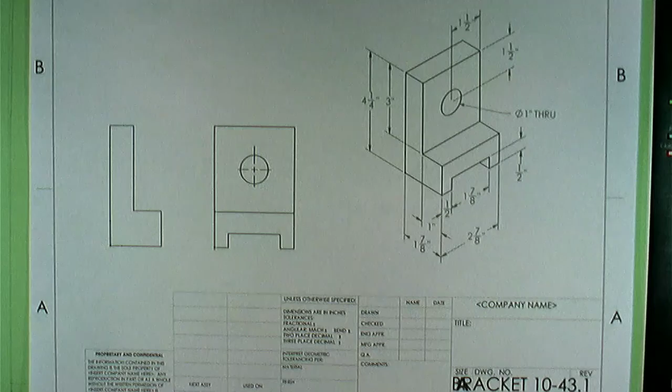So I'm going to show how we can sketch this out and throw some dimensions on it. I'm going to do this part first, just doing a sketch. Basically, we're going to produce this, but I'm going to go through actually doing it. And then I'm actually going to show how to draw it on green paper. We're going to start by looking at this, though. So this is the object that we are going to draw in orthographic, but then dimension.

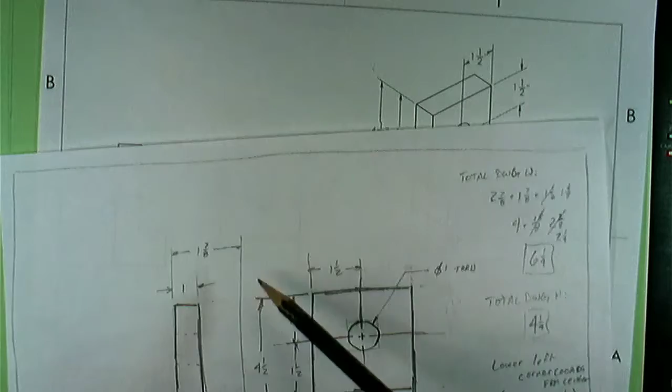The reason I'm giving it an isometric with the dimensions here and then an orthographic over here is because I just want you guys to focus on the dimensioning aspect. Drawing this in orthographic is going to be a piece of cake for you, but adding the dimensions is what's going to be the new challenge because that's what we're going towards learning. And that's why there's no dimensions on here, because I want you to actually use appropriate dimensioning techniques to get the dimensions to all the places where they should be.

So that being said, these dimensions may not be the exact right dimensions that you want to use or in the exact right places, because you're going to have to do some thinking and make sure you follow the rules that we've gone over in class on where dimensions should be. So anyways, though, this video is going to show how to do the sketch.

To start out, I'm going to start with a blank piece of paper, right? I just so happen to have this here. I'm going to move this off to the side so I can pull it in when I need it. It's never a bad idea when you're doing a sketch to throw on a loose border, just so you're kind of thinking it's a sketch. The lines don't have to be perfect. It's just sort of the gesture of a border. So we're sort of visualizing every piece of this drawing that we're going to have to do ahead of time.

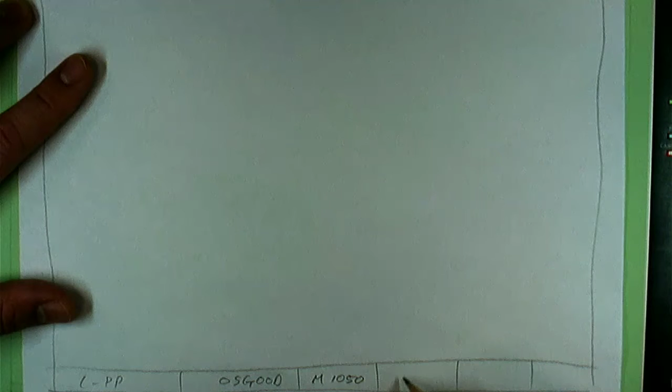CPP, your name, the class, the date. What is it? The 13th today? Yeah. The scale of this will be 1 inch equals 1 inch. And this one will be, we'll call this bracket.

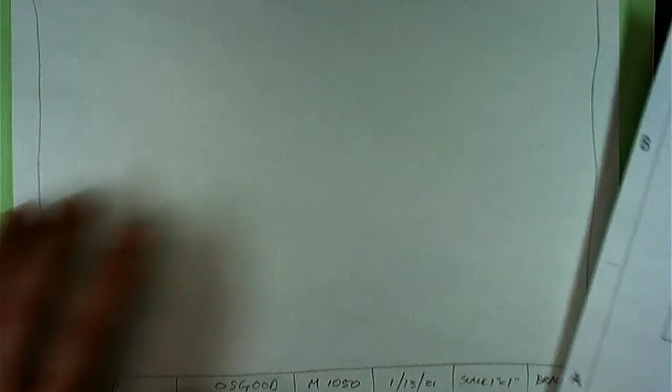And because this is the kind of first drawing we're doing, I'm going to show you exactly the one that I'm asking you to do in class. In the future, I may make different videos, but it's not going to be the same one that I assigned. So this is what you're going to be given in class. And what I'm about to show you is what I'm expecting you to do first before drawing it on green paper. I really just want to be really clear about this, and I haven't done one like this for this class in a while.

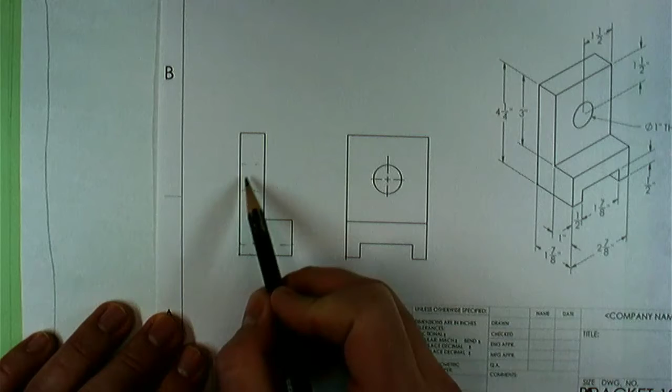So looking at this object, obviously we're going to have to create these shapes here. And actually this is missing, right, like a hidden line that goes down here. So we'll have to throw that in there too. And it's missing the hidden lines for these circles. So we could put a center mark in there too. But let's just sketch for a second. I wanted to show you guys how I sketch these things out. I'm going to just start with that front view.

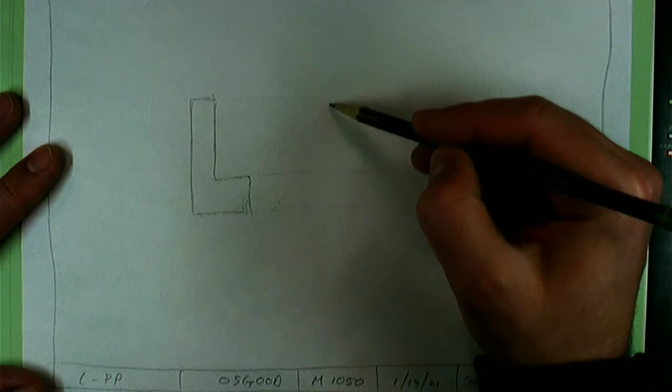So we definitely know, looking at the isometric, that it's going to be a kind of L shape. Ooh, it's actually a little shorter than that. So you always want to try to, when you're sketching, get these proportions about where they need to be. Yeah, something like that looks pretty good. Let's project over to get the right side view. We're actually going to just omit the top view just for the sake of simplicity here. So something like about that.

We'd see that there. And if we look over here just at the isometric, we know we have this bump up in the middle and we have the hole. So I'm going to go like this for the bump up. And now I see, okay, that's where that hidden line is going to come in there in the front view. And then I also need that hole. So let's find the center mark for that first. Always start with the center mark before you go sketching a circle or an arc in.

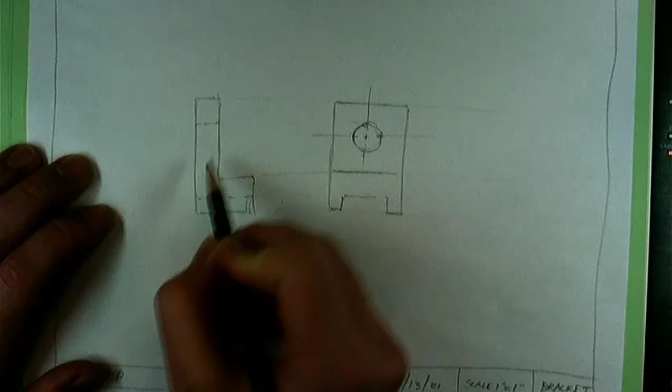And then we know that it's going to be around there some distance. So I'll sketch in that little circle. And that gives us the top to bring over for hidden lines and the bottom to bring over for some hidden lines. So things are looking good there. Let's make that hidden line look more like a hidden line. Cool. Okay, now we can start adding the dimensions. So thinking about what we learned in class about how to place these things, and you know what, I'm going to zoom this a little bit.

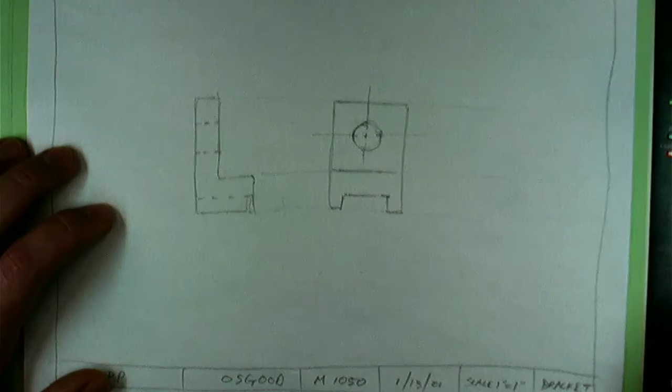That's better. Let it focus for a second. Hello. Okay, perfect. And there. Okay, that's pretty good. So thinking about what we learned in class, can I lock my keypad here? There we go. So we don't have to see that weird menu sometimes.

So thinking about what we learned in class, we want to show the dimensions in the view where they basically make the most sense. So in our case, actually, now that I'm looking at my own dimensions, I think I could have done them a little better. We want to try to keep dimensions between views. We want to always show the center location of things. And again, we want to show things in the view where they make the most sense, basically where the most shape is seen. So in this case, we definitely want to start showing what I guess based on our views is our width here in this area right here.

So I'm going to show the distance from the left side of the object to the back of the object. And taking a look at our isometric here, we know, okay, from the left side to the right side is, let's see, 1 7/8 of an inch. So basically what we're doing is we're planning out where all these dimensions are going to go so that we don't have to think about it when we're actually drawing on the green paper, which is underneath all this. The distance from here to here is about 1 inch. So I'm going to show that right here. And then we could sketch in our arrows.

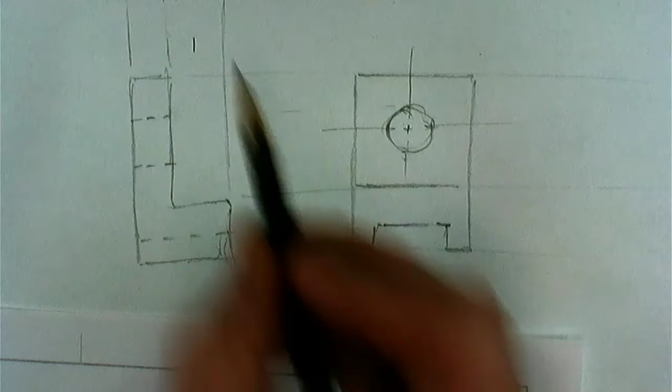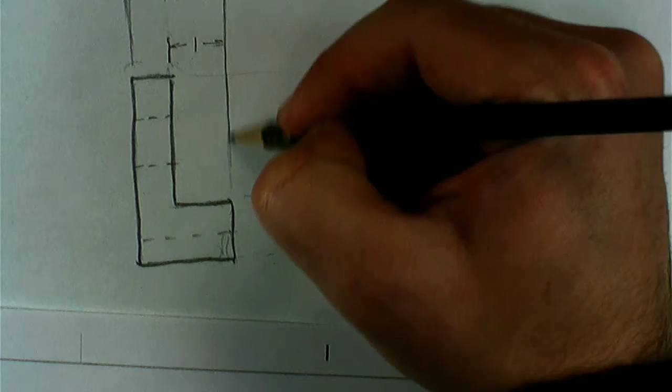And notice, following the rules that we've talked about in class, there's a gap, a gap, a gap. There should always be a gap between your object line and your extension line. You never want to have your extension line touching. And our extension line should be thinner and lighter than our object lines. That's why I'm darkening things in here so that they're sort of distinguished. And we even see that actually in the isometric here: these are actually slightly lighter. You'll notice they're more gray than the actual object lines. So let's add more. Okay, so those are some extension lines.

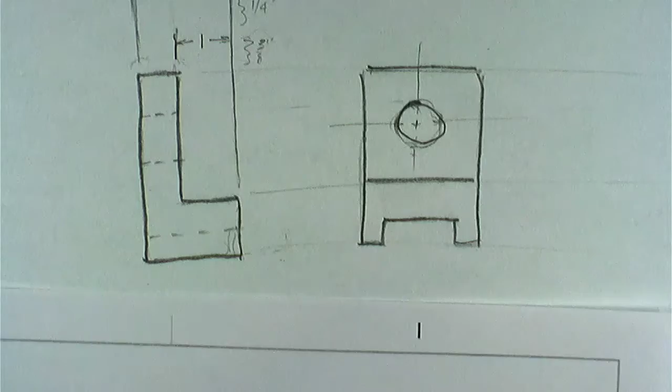Oh, and we do want to remember too that the distance between the object and the first dimension, remember we said, should be 3/8 of an inch. You won't write these in, I'm just putting them in for reference. And the distance from here to here should be about 1/4 of an inch. Obviously, I'm just sketching this, so it's a little ugly, but when you go to do it on your real drawing, you want to make sure you hit those right distances. So let's keep going. So we just took care of these, okay?

We also need to know some details about the overall height. So why don't we put some of these on here so we can tell that the distance from the top to the bottom here is definitely 4¼ inches, but I have to do another one inside of that for this distance. So let's add that on here. And again, I'm doing it in the side view here because we see more shape. So it makes more sense to show that here than it would in the front view because you can see a little more clearly the actual edges that I'm dimensioning to.

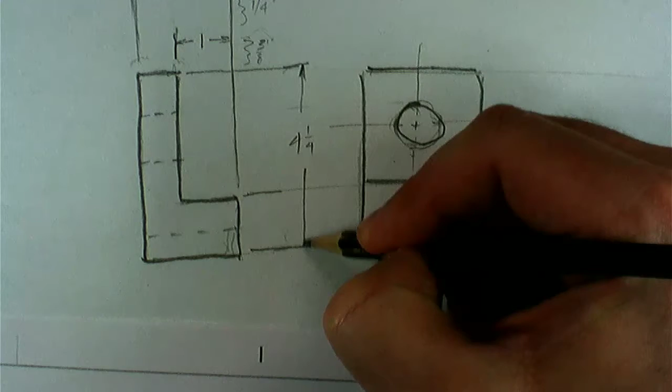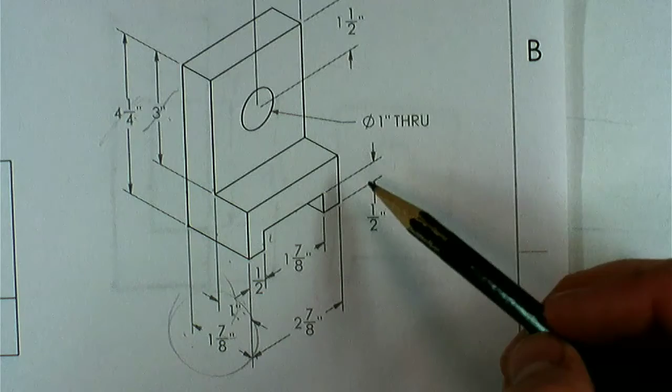So that was 4¼, an arrow, 3 inches. And I'm not putting inches after any of these because down here on the bottom, I said that my scale is 1 inch equals an inch. So I don't need to be redundant and keep showing that. Cool. So we got some of those taken care of. I just took care of these. Now, you may be tempted to try to include the dimension from here to here over here because you've already done that, or the dimension for the hole, but it makes more sense to show those in between these two views.

Now, in this case, I might break a little bit of a rule because of the way I drew these so close together, and I could probably put the dimension on the outside. But in a real drawing, we want to try to keep the dimensions between the views as much as possible to keep things nice and consolidated. I'm going to shrink that down so that now I can start putting dimensions for the location of this hole and other things in the other space over here on the other side.

So let's do that. Let's see. We're going to definitely want a dimension from here to here. We want a dimension probably from here to here. Look, I've already sort of got a line for that. And we want to definitely dimension from, let's say, actually, let's start from the top. So that's a sketch. It's almost like having a conversation with yourself. Like, where do these things go? I have a pencil. I can erase. So maybe I didn't want to do that.

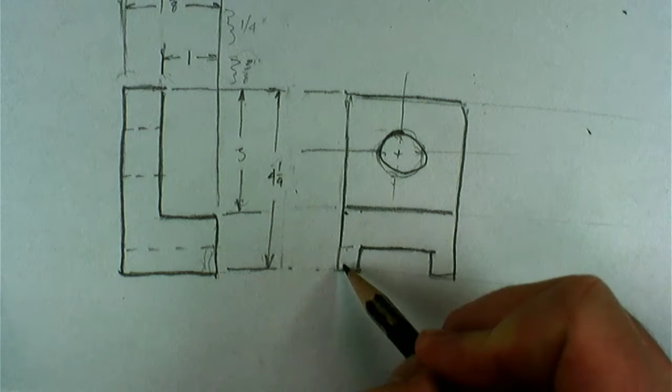I want to go from the top to the center of the hole. Good. So there'll be a dimension in there. From the center of the hole down to the bottom of this surface here. Oh, wait, I've got that already. I don't need to even put that in there. So let's just go from the top to the bottom. In fact, I do need to show the distance from here to here. So again, a conversation with yourself.

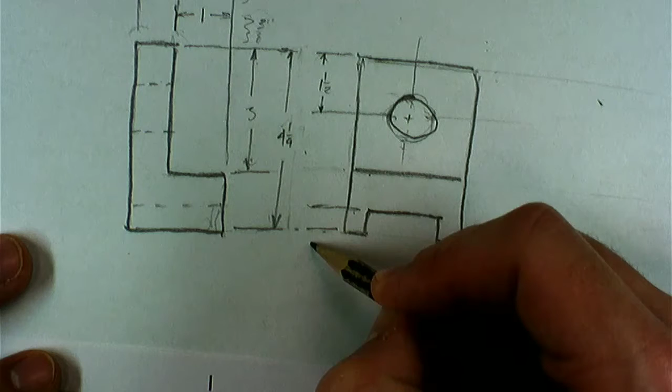So this distance is 1 1/2 inches there. So I'm going to put 1 1/2 and get some arrows in there. And down here, I'm going to do a 1/2 inch for that distance. And I don't think that's going to fit too well inside there. So we can go like this, 1/2, and then put an arrow in there, and that would be acceptable in this case.

Then we've got to dimension this dimension here. So again, it doesn't have to go from here to here if we know that this is centered, which, oh, it's not though, actually. It's 1.5 inches from here to here. So let's make sure we put that in the right spot. So that's going to go 1 1/2. And let's see, is there anything else I'm leaving out here?

So on the bottom, I'll do the overall 2 7/8. 2 7/8, and I left myself space inside so that I can do this dimension and this dimension. We have 1/2 and 1 7/8. So those are going to go right in there, and we'll stick a little arrow on the outside of that for the 1/2.

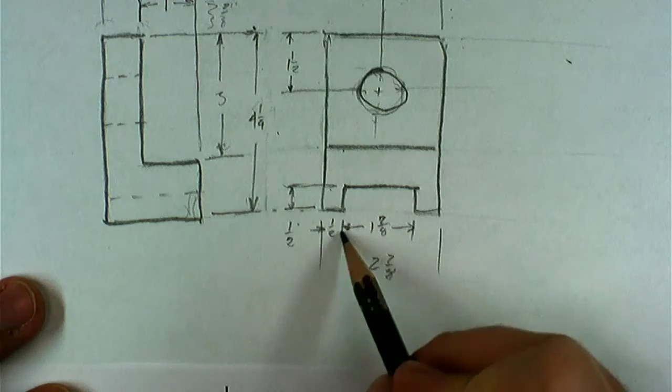Oh, I also have to do the leader for the hole. So remember, an arrow or a leader always points towards the center. So I'm going to sort of pretend I'm doing a line out, but I'm only going to darken the part that goes outside here. And that is 1 inch, and it's what we call through. So, diameter 1, THRU, meaning that's a hole that goes all the way through. And now, I do believe that I have all the dimensions I could desire on here. Remember, you're going to leave these off. I was just showing that to remind you of those distances. Oops, I left out an arrow.

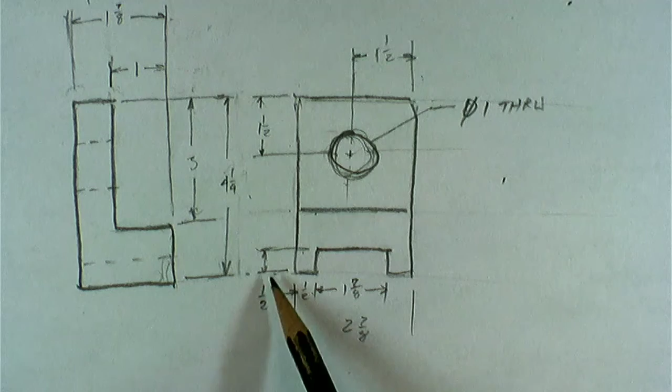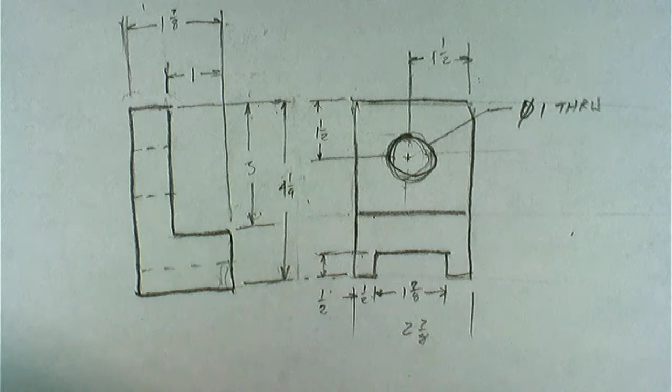Yeah, so I think that pretty much encapsulates all the different distances. So there are other ways to do this. Like maybe it would have been better to put this 3 over here so that it was more together with those. But dimensioning is sort of an art, and you will get different ideas of how to dimension things based on just doing it over and over and deciding what looks good and what doesn't. Because remember, the main goal of dimensioning is to communicate details about the object to anyone who's going to look at your drawing. So, all right. I think that kind of sums this up.

Oh, the last thing too: always remember you'd want to calculate the overall size of this base drawing so that you can position it correctly on your green paper from the center of that green paper. So we can calculate that by looking at these overall distances here. And again, these are not dimensions you would include in your drawing. These are just for me to use here while I'm talking to you guys.

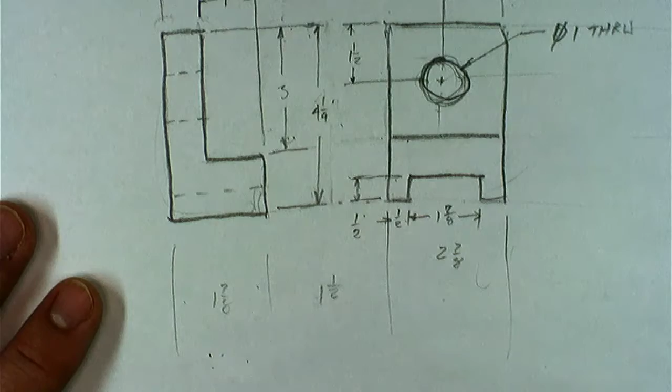So from here to here, let's see, that's 1 7/8. We're going to leave 1.5 inches between the views, and the overall width of this is, what is it? Did we leave it off here? Oh, no, I included it, but I didn't include arrows. So there's that. So let's see, that's 1 7/8 plus 1 1/2 plus 2 7/8, and that comes out to, you can do the math on your own, 6 1/4 is our overall width, total width.

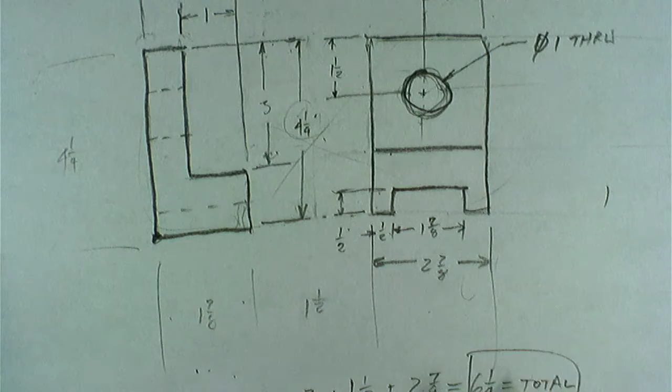And then let's draw a box around that. So remember, our total height is super easy because it's just the height of the object, and we wrote that right in here. That is 4 1/4. So we know that if we're trying to find this lower left corner from the center of our page here, how far we have to go over and how far we go down, we're going to cut both of these numbers in half. So half of this is 3 1/8, and half of this is,

oh, maybe I'm off the screen there, 2 1/8. So our distance over and down would be, let's see, negative 3 1/8 from 0, 0 at the center, and then down to 2 1/8. So, that'd be negative 2 1/8. So that would be this point right there. So you know that when you're getting started in your drawing, that is going to be the spot that you're starting at.

So hopefully this helps to see how we generally lay out dimensions and how I expect y'all to sketch them. And then later on, I'm going to have a second video here that's going to show how to draw this on the green paper, and that will be coming up shortly here.

So this video is going to show how to draw this object that we see here, which I have shown already. I sketched that out from, where'd it go? From this right here, which is the assignment that you're working on. So you should be able to follow along with this if you need to. So I'm going to go through actually drawing out the general shape of this for a minute first.

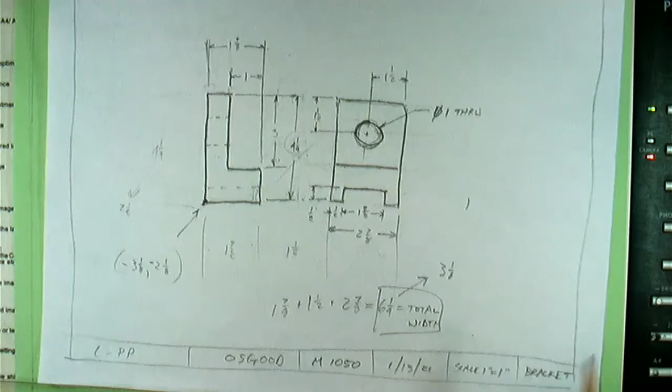If you don't need that and you understand how to do that, you can skip right ahead to the part where I'm dimensioning this. But I wanted to do that first just in case there is anybody who wanted to see that again, just as a refresher, because it's been a while since we've done one of these on a piece of paper. So again, in the description, there'll be a link to skip to the part where I'm dimensioning.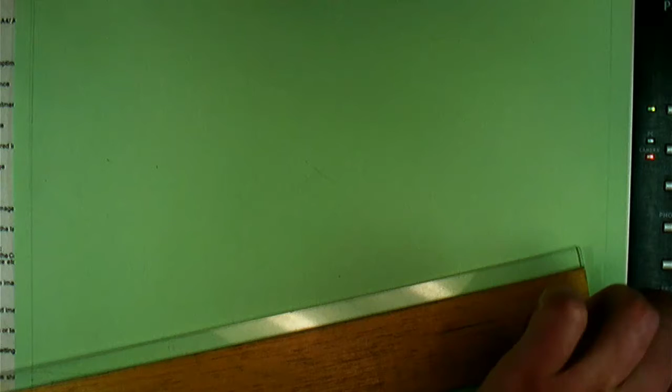So anyways, we're going to start with this point down here, which I already have my center marked out on this piece of paper. It might be a little tricky to see. There we go. If I adjust the brightness, that seems to make it a little better. So let's see, keypad locked, good.

So I'm going to start with this point down here, which is 3 1/8 over and 2 1/8 down. So I'm going to do that here. So 3 1/8 over right there and 2 1/8 down. Now, normally I yell at people and I say, oh, you got to use your triangle to get that vertical point. When you're just starting out and you're getting this mostly centered, it's not the end of the world if it's not perfectly centered. If it's a tiny bit off, usually people won't even notice, especially with us adding dimensions. So don't overthink that stuff too much here.

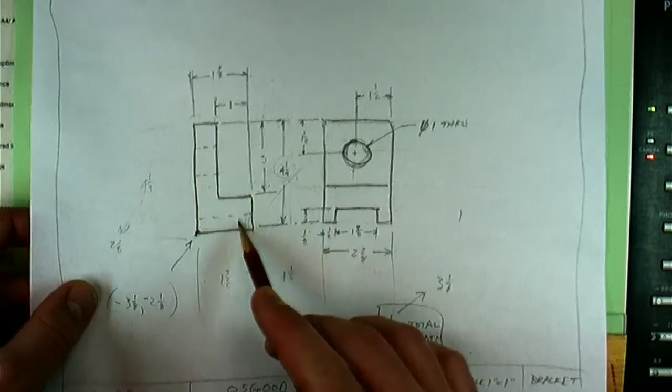I am using a 4H pencil to be drawing out and sketching out this early part so that I can make sure that everything is nice and light and easy to erase later if I need to. So I'm just going to go in here and sort of mark out that lower left corner there. And then I'm going to start making these marks across to get my front and right side view blocked in so then I can cut away some material here.

So let's see. The overall width of this is 1 7/8. So I'm going to go 1 7/8. Then I'm going to leave 1.5 inches. So there's 1 inch. And then 1, 2, 3, 4/8 for 1/2 inch. So there's my space between the two views.

And then 2 7/8. Let's see, I'm going to go over, can I get this right? 1, 2, 7/8. 1, 2, 3, 4, 5, 6, 7, 8. Now, the reason I didn't move my scale was because every time you move your scale, you actually run the risk of introducing a tiny bit of error.

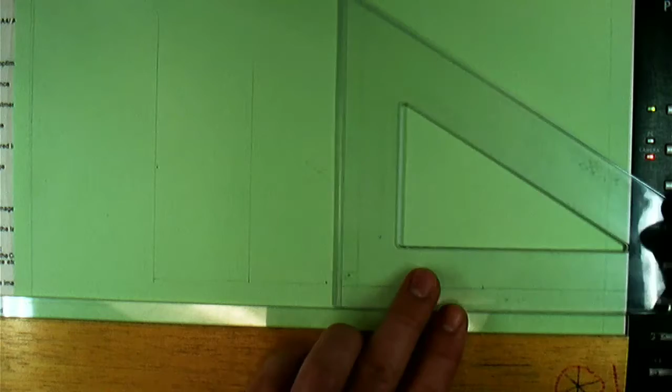So I'm trying to avoid that. If you move your scale, oh well, we'll figure it out. We'll make it through. But just know that it can introduce a little accuracy errors. So if you can actually count over, then you're going to have better luck in the long run.

And I'm looking at this now. Well, I guess that's right. Sometimes you end up sketching things and it looks totally different when you actually draw it. And that's what I'm looking at now. I'm like, this looks like it's going to be a lot different than how I sketched it. So I must have sketched it a little wrong. So we're going to find out.

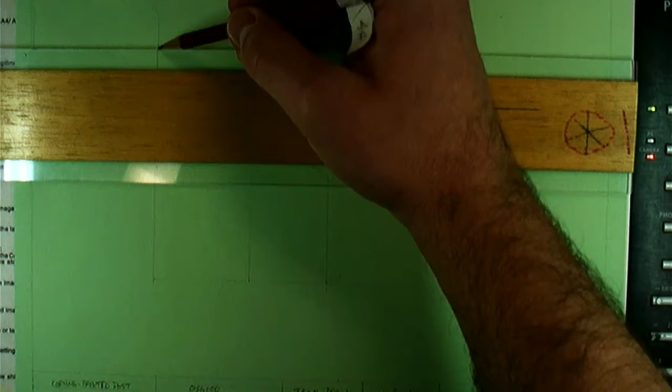So for the height, I've got 4 1/4. So I'm going to go up 4 1/4 of an inch. 4 1/4. And I am resting this on the T-square, which isn't the best thing in the world, but it'll be okay. 4 1/4. So there's the tops of my views. Yeah, so these are going to be a bit of a different shape than I was expecting, and that's okay. That's what you learn sometimes.

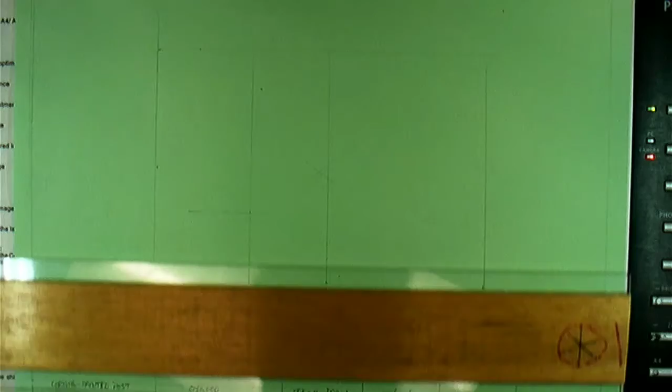All right, from the top, let's see, 3/8 of an inch down. So I've got my general shapes outlined here. 3/8 of an inch down to get this line, and 3 inches down and 1 inch in. So let's throw that on here. So 1 inch in and 3 inches down. Ta-da. Like that. Get us a nice vertical line in here. Oops. I'm running into my projector here. So there's our general shape for that part. Then what else we got here?

And there may be a bell that interrupts this. I'll try to cut it out if that's the case, but just FYI, people.

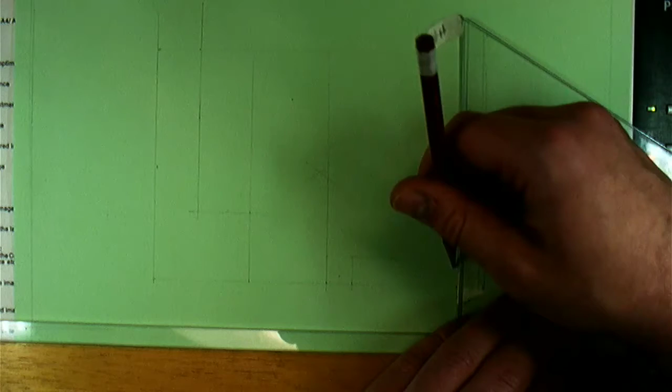So, all right, let's do our right side view now. So we just did the front view. So I know that I have to come up 1/2 inch to get that little doohickey in there, that little opening. So let's get a horizontal line across there lightly. And I also know that I have to come 1/2 inch in for these sort of legs. So we'll do that on each side. Again, I didn't move my scale as much as I could avoid it so that I didn't introduce any error into the drawing. All right, there's that.

I'm looking at this. Let me adjust the brightness on this again. Oop, my keypad's locked. Hey, there we go. Ooh, nope, that's not good. That's not what we want. Well, oh, there. Yeah, if I make it darker like that, I think it's a little easier to see the lines. So, cool.

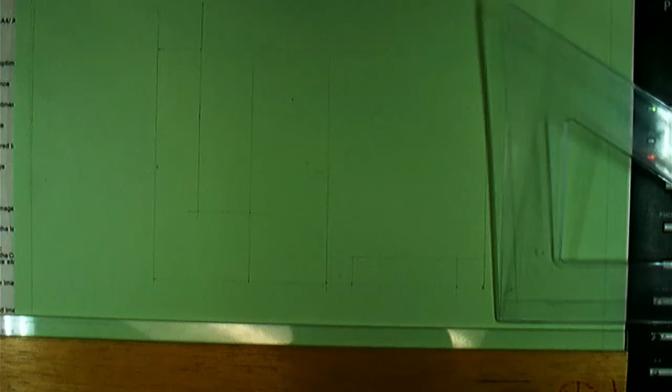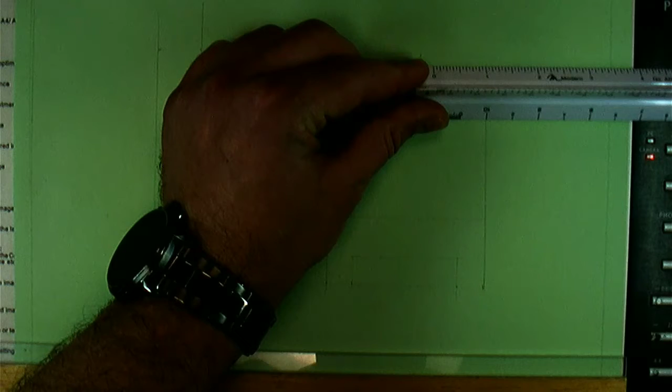Let's find the center of that circle. I will be able to project this line over, so I'll do that quick, and then I'll find the center of the circle, which is 1.5 inches in and 1.5 inches down. So first let's project this line over, and then 1.5 inches in and 1.5 down. Oops, 1.5 in. And then let's get a bit of a vertical line on there. And 1.5 inches down on that. Where'd we go? 1.5 down. And there is the center of our circle.

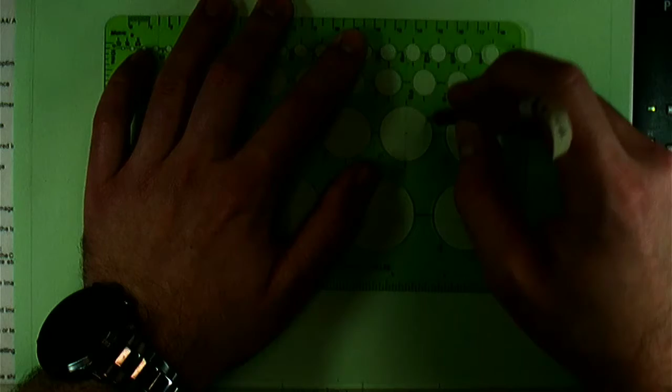So now we can throw that circle on there. That circle is 1 inch in diameter. So I've got my center mark put on. Let's find a 1 inch circle. Lay that on there lightly with some light construction lines. Get that on there. Beautiful.

And let's get some hidden lines up in here. So that's going to be a hidden line. And so is that. I'm not actually going to make those into hidden lines just yet. I'm just projecting them for now. When I go through and I darken everything, that's when I'll make those into all the proper lines.

All right, now I'm just going to preliminarily erase some of these because I'm going to come back in and darken everything later. So I didn't need any of that. Didn't need any of that. Good, good, good. Cool. So this is looking a little cleaner already. We can already see the shapes taking form.

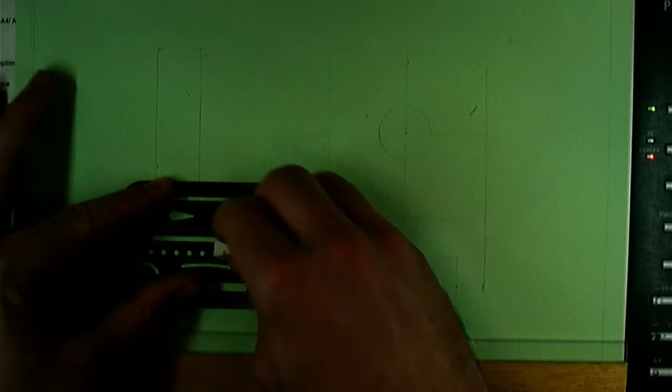And you know what? I could get in here and I could turn these into hidden lines now, and then we'll just darken them later. So I'm using my eraser shield as best as I can here to create those hidden lines. Ooh, right there. Ah, better. And these were all hidden lines too. So never forget the power of the eraser shield over here.

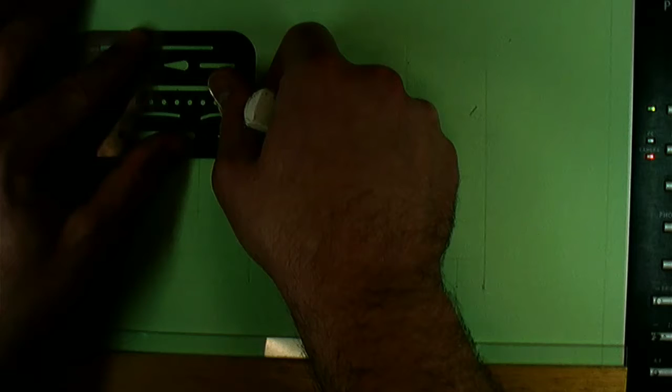It can be super helpful for creating nice hidden lines. We'll slide this down. Try to keep those kind of the same. Cool. All right, that's looking pretty good. Clean that up while we're at it, but we're going to darken everything later. All right, now our basic general shape is done.

So I'm going to darken this now. I'm going to speed up this part of the video, but I'm still going to record it anyways. I like to darken this first before I add the dimensions, just because I think it makes things a little crisper and cleaner. So that's what I'm going to do now. So you can just watch this part. It'll be sped up.

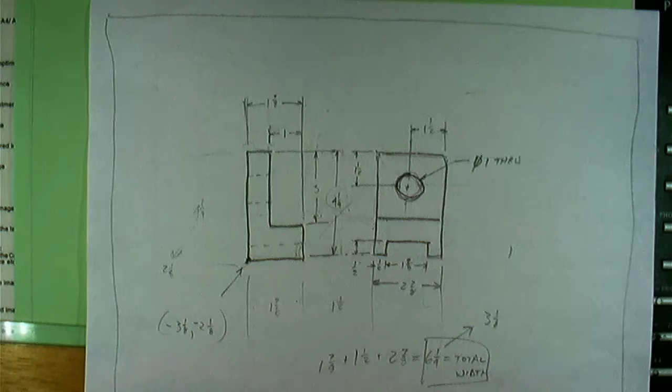All right, awesome. So this looks pretty darn good now. So now it is time for us to start getting those dimensions on there. We already figured out where they're all going to go. Something that can help you a lot: the distance between the object and the first dimension should always be about 3/8 of an inch. And then the distance between any dimensions after that should be 1/4 of an inch.

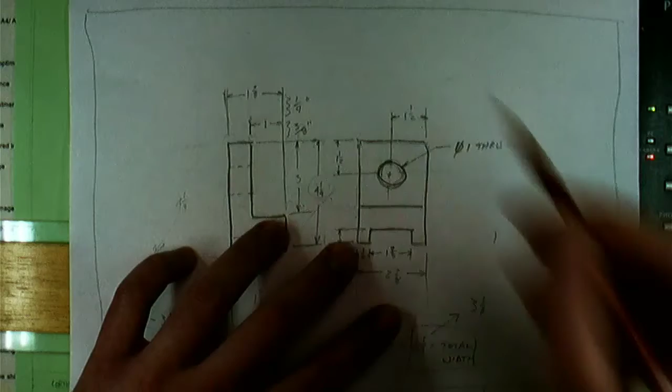Okay. So that being said, it actually turns out that this distance right here is exactly 3/8 of an inch. You might remember from doing your border and your title block that that's 3/8 of an inch. So we can totally use that to our advantage. We should have also scratched a line onto our triangle that is the same distance as that piece of acrylic on there. So that's going to help us do all the different things we need to get our dimensions on here appropriately.

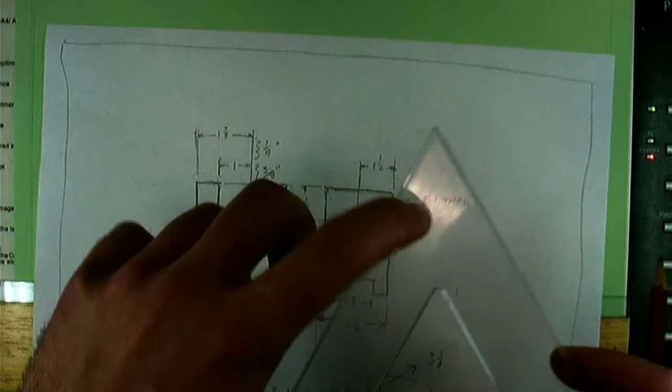So what I do is I first lay off all the extension lines that I'm going to need. Then I lay off all the distances that I'm going to need. And then I add in the numbers last. So let's do that here. I'm just going to pick a spot and start there. I'm definitely going to need extensions for these. Actually, let's start with horizontal extension lines just because it's easier. So here, here, here. Let's get those on.

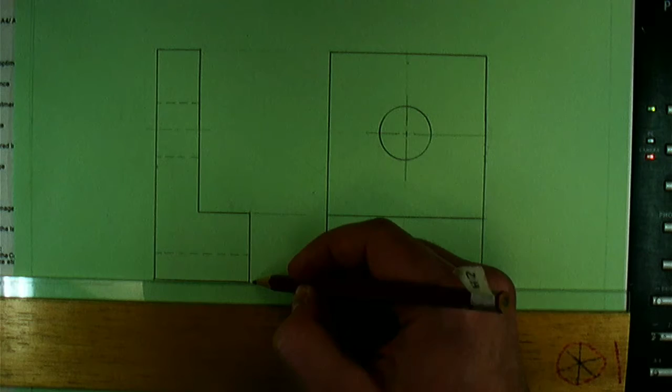So again, not touching the object. They should be far away. And you should use a 2H pencil for this. That's going to give you the best possible line weight. So I'm just going to bring these off of here. I'm going to make sure they're not touching. There should be a visible gap, but I want to make sure they're pretty clear. I'm not going to worry about how long they are for now because I can erase a bit later, but I want to leave myself enough room to fit all the dimensions I need. So there is that one.

So let's go like this, and let's actually put the number on there. Well, first we need to get our arrow line in. So this is where this comes in. You can slide this around, and it's kind of weird because I have all these lights here, they're reflecting funny. You're going to line your line up with the edge of your object, and then you can draw one of your dimension lines down, and then I'm going to space another one after that.

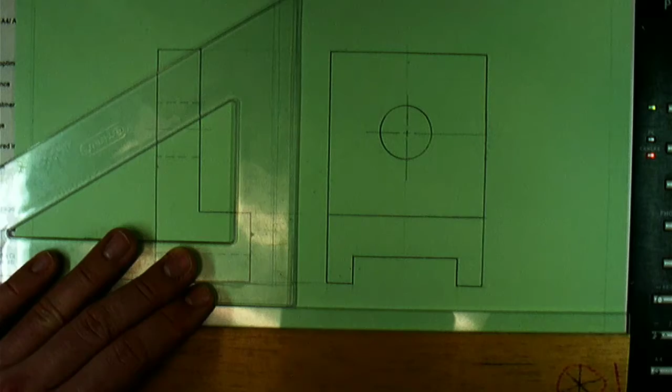So the rule is 1/4 of an inch, but if you have the room, you can actually go longer than 1/4 of an inch and leave more space between the dimensions, and it's okay. So I'm going to go like this. But actually, that'll leave enough room on the other side for one more set of dimensions. So, yep, we're going to go like that. Let me extend this a tiny bit further. There we go. So I'm going to write in my numbers now. So this is 3 and 1 1/4.

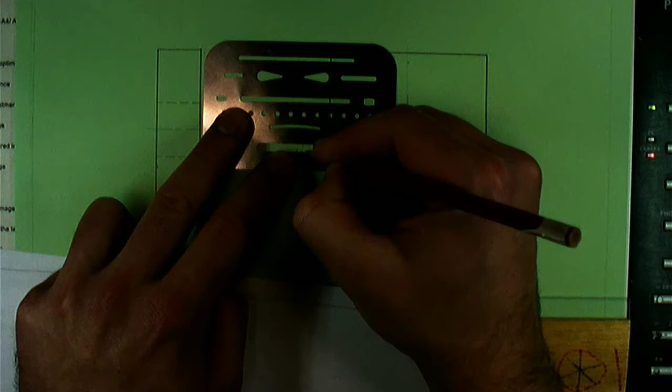I'm going to use this open area on my eraser shield to write inside of so I don't have to use guidelines. So that one's 3, and let's do 4 and 1 with a line over 4. There we go. And then I can come in here and darken those dimension lines that I started there. So I'm going to make darker lines, and I'm going to make sure I leave a gap around that number.

So this one's going to go all the way to the bottom, up to the top. And now I can kind of clean this up. Like, I definitely didn't need that going all the way out that far. I don't need this light line down here anymore. That can go away. And last but not least, I can put my arrowheads onto these. Long and thin. Long and thin.

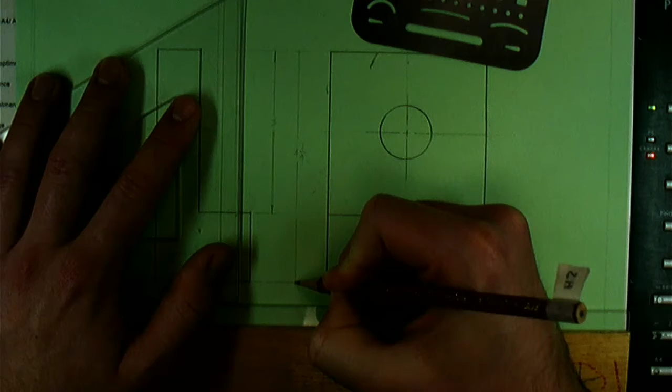And you really want to make sure you save the arrowheads for last because they're very hard to erase because they're usually a little darker. And sometimes you got to go and clean up a line or something too. So let's just fix that little gap that I created. And now we have our first set of dimensions done. So let's just go through one at a time, and we're just going to keep adding more.

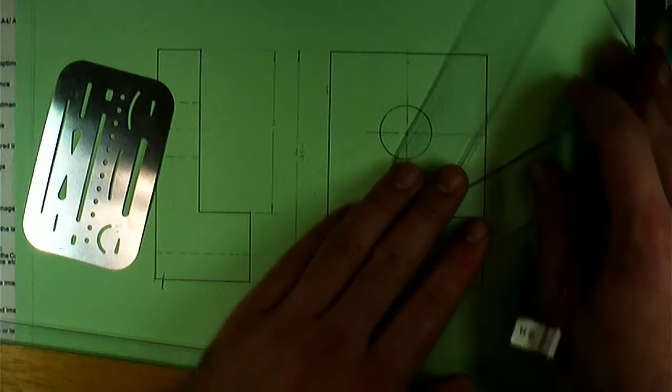So at this point, if you think you understand how this is done, you can probably dip out. Oh, you know what? Before you leave, let me show also how to add the leader over here for the diameter. So I'm going to make sure that I have a line that's going right through the center of that. I'm doing 30 degrees because it's easy. You could pick this up and do it at any angle. Sometimes you have lots of different leaders you have to draw, all coming from the same center point, and you want to do them at different angles so that it's easy to see.

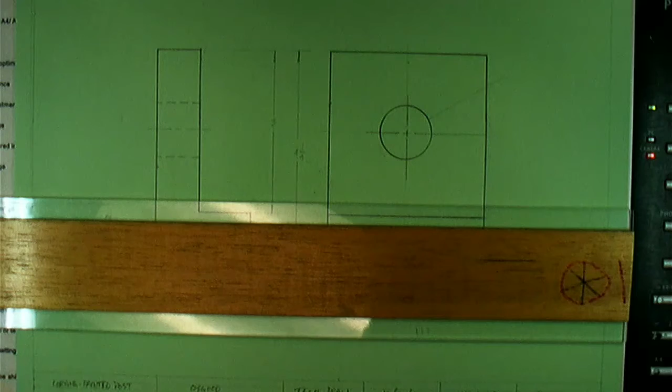So let's draw a leader off of here. We're going to come up about that far. And again, you really want about 3/8 of an inch of space before you go with your horizontal line coming off of that leader. But then I'll do a horizontal line, and then I will put my number in. So that was a diameter of 1, and it says through, THRU. Make sure you are lettering these neatly, and then I will put a little arrow on there. So that's kind of the basic gist of dimensioning.

So again, if you get it now, okay, you could probably leave. But if you want to see how I dimension the rest of this stuff, I'm going to do the whole dimension next, and then I'll add in the rest of them. That might be beneficial for you if you so choose. So you can go now or you can keep watching. I did do my 2H pencil also when I did my center lines and my hidden lines. So that's something to keep in mind.

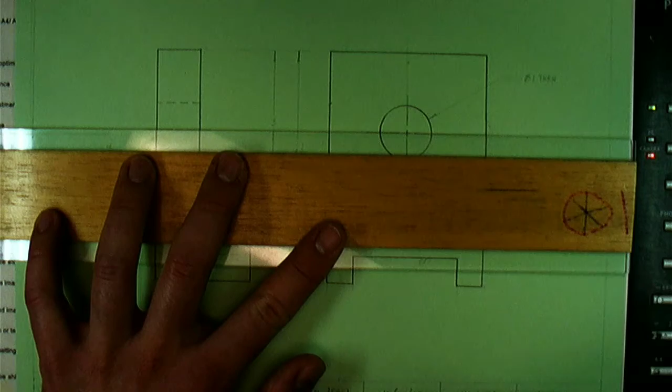I'm going to add this 1.5 inch mark in here, and then the 1/2 inch mark there. So let's draw those extension lines. I need one coming from the top, and I'm going to have some stuff running into each other up here. So I may want to clean things up a bit. I'm going to put a gap back in there because I accidentally got rid of it. Let's see, the bottom here too, my extension lines are a little long. So sometimes things are tight, and this is where you actually may want to leave a little more room between your drawings, but you know, it is what it is here.

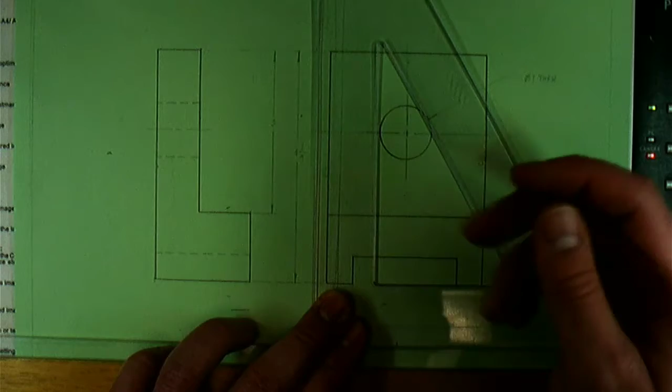So let's see, does this fit? Yeah, that's going to be a little tight there too. So this is going to be a little close. So this is maybe not the best example. I needed one off here too. So I maybe should have moved this over a bit, but you know, use a little more foresight than I did and leave a little more room between your drawings.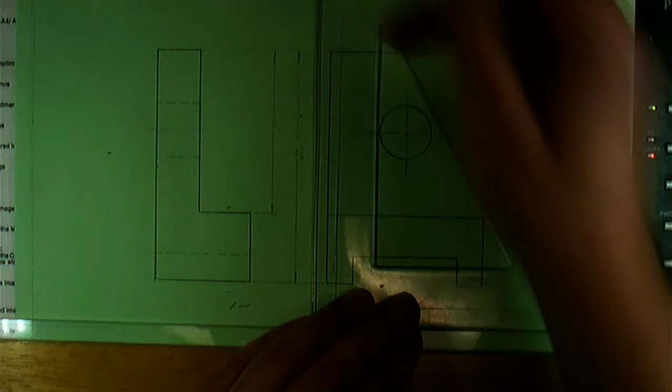And it actually looks like I'm going to be able to do my arrows on the outside of this one. So I'll put my number on the inside and it's going to fit, and I'll have an arrow from here to here. Okay, this one up here was 1.5. This one down here was 1/2, so I'm going to get 1 line for the fraction, 2 on the bottom, and good. And then we can get our arrows on there.

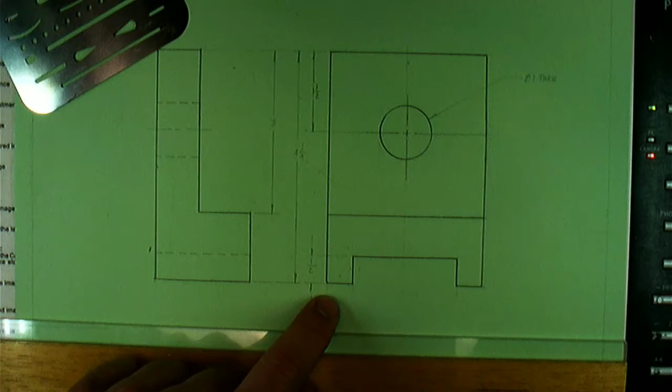Arrow, arrow. And let's clean this up a little bit and kind of darken that so that it's pretty clear that there's a gap there for the number. We don't have to do that down there because it was spaced off there. So there is that point right there. Let's see, what else we got to add? We got to do these bottom ones.

We got to do the hole. I skipped the hole there. Well, I did one of the holes. I got to do the other one up here. So you can see this part of the process is pretty hodgepodge. You're just pretty much checking off all the dimensions that you should have had right on your sketch to begin with. And you're just going through and adding them one at a time and making sure that they're in the right spot and that they follow all of our rules.

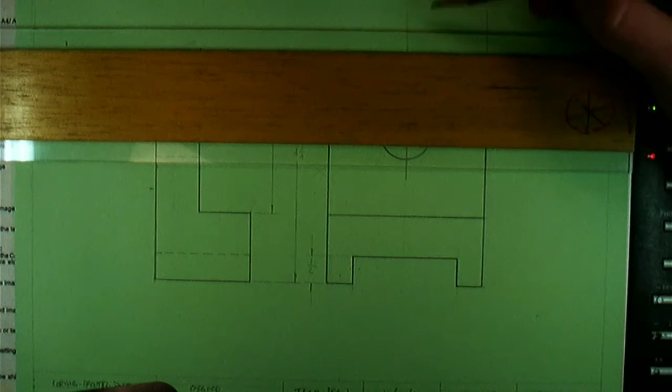So again, that visible gap, there should be a gap. It's probably hard to see in the video, but there's a gap right there. With our center line, the gap is really down here. That's how you can think about that when you're using a center line to dimension. Let's draw the dimension line, which is the one that's going to take the arrow. Let's put our number in, 1.5 inches, 1 over 2.

Let's darken, just leaving a gap for that number. And then let's add our arrows, long and thin. That was a good one. And finally, erase just a bit of that extension line that was going a little too crazy up above there to clean it up so it looks nice and crisp and clean. There's that one. What else we got? Got to have these up here, and got to have these down here. So let's get those in.

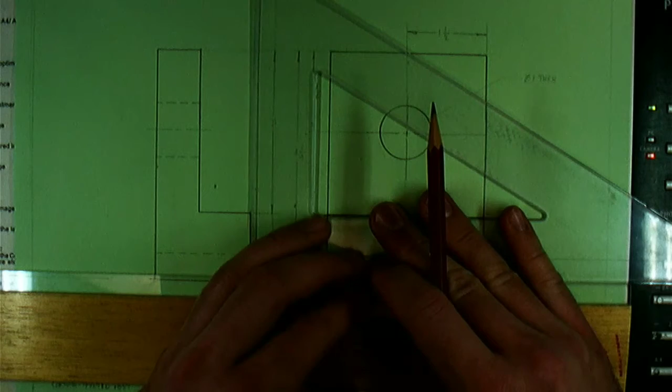Let's start with these up here. Extension lines. One extension line off this. One off of here. One off of the end. Bam, bam, bam. Bring this up. We're going to have something there. We're going to have another one off of that. And so actually I didn't make that extension line long enough. So you come in and correct it. And you just keep going like this until you have everything that you need.

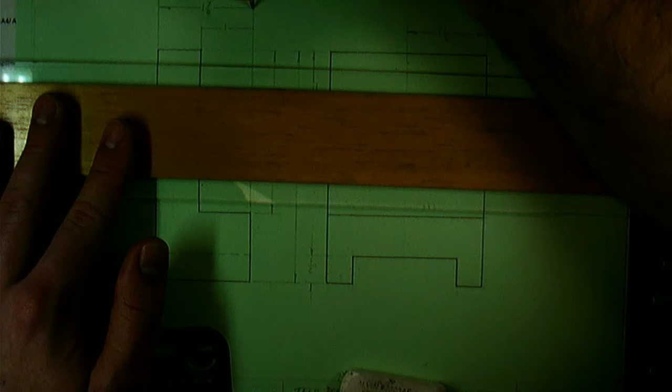So we had a 1 here. 1. And then this overall big distance up here is 7/8. I'm just going to erase so I have a spot to write it. 1 7/8 rather. 1, 7 over 8. Okay. And then we'll clean up again using the eraser shield if necessary, but I don't really feel the need. Darken a bit. And we'll use the eraser shield for this part up here. Arrows. And we can erase that bit in there. So you see how this goes.

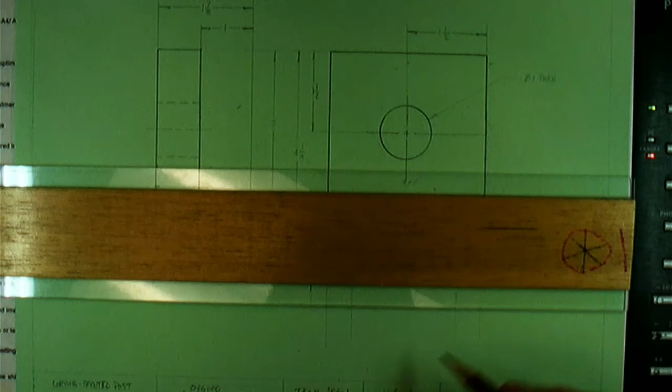So 2 7/8. 2, 7 over 8. This distance is 1 7/8 up here. 1, 7 over 8. And 1/2 for right here. 1 over 2. That was a little small. Darken some things in. I'm going to put these on the outside again for that one. Darken, darken, darken. Overall for this one.

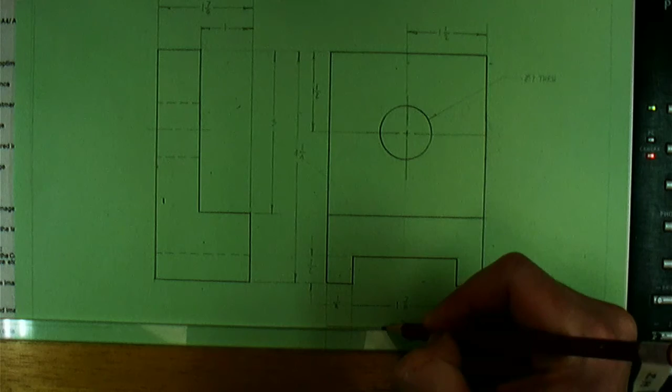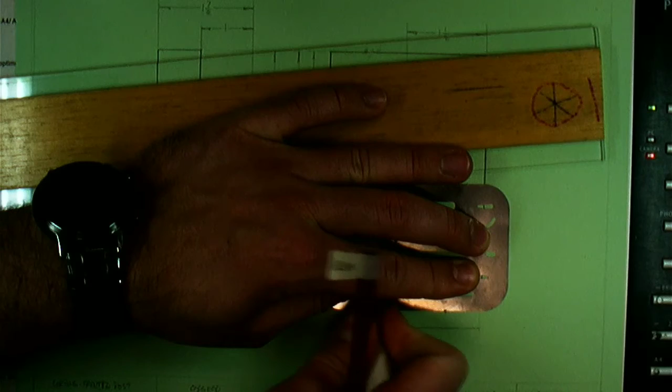Clean up a tiny bit. Clean that there and there. And then some arrows. Long and thin. That one was less good. This one was a little better. That one's a little wide. This one was terrible. So, and actually in this case, I didn't really do my extension lines dark enough. So you'll just get a feel for what things will look like.

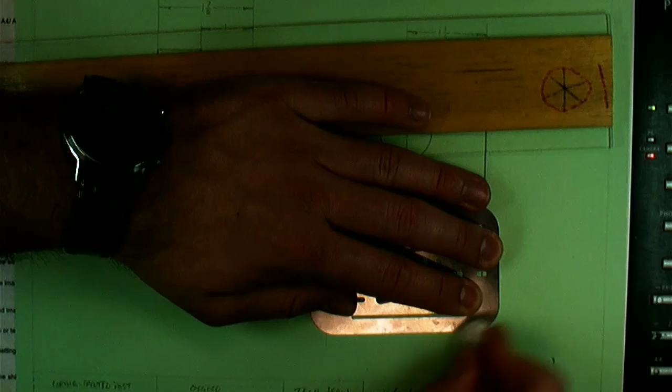I'll give you feedback. You'll start to understand in time what is a good look and what is a bad look for a dimension. And we do want to try to keep these even. So I'm over here being a little sloppy because I'm getting hasty, but you want to try to keep those little spots where it sticks off even. And I think that is all of our dimensions. So aside from maybe going through and touching up some of these spots, like this extension line looks a little dark. Oops, and I don't want it to connect to that side. Leave a gap in there. Aside from touching up some things like that, this is pretty much done now.

This is a fully dimensioned, nice drawing. The only criticism I give to myself is I could have spaced these apart a little bit better. And I think that may have helped a little bit. So that's something to think about when you're doing this, is make sure to leave yourself enough space between those views. So hope this helps, and good luck out there, people.